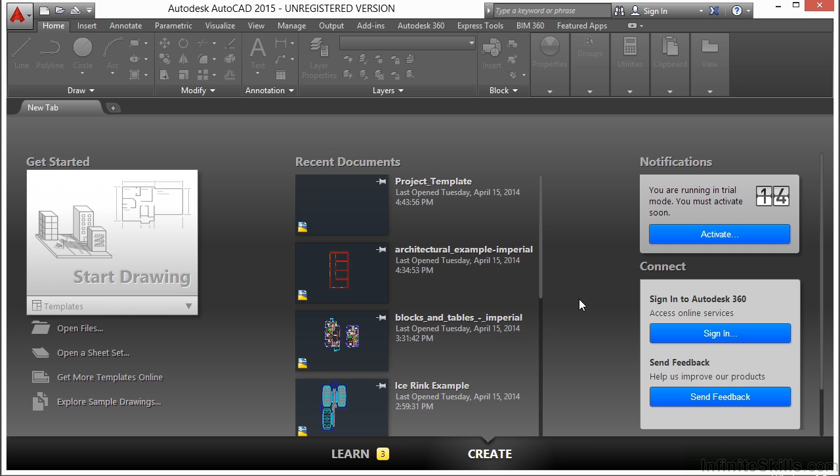Let's open up the dimension example drawing for this chapter. You can create dimensions for a variety of object types in many orientations. Linear dimensions can be horizontal, vertical, aligned, rotated, a baseline, or a continued or chained string of dimensions. Here we have several dimensions on this bracket.

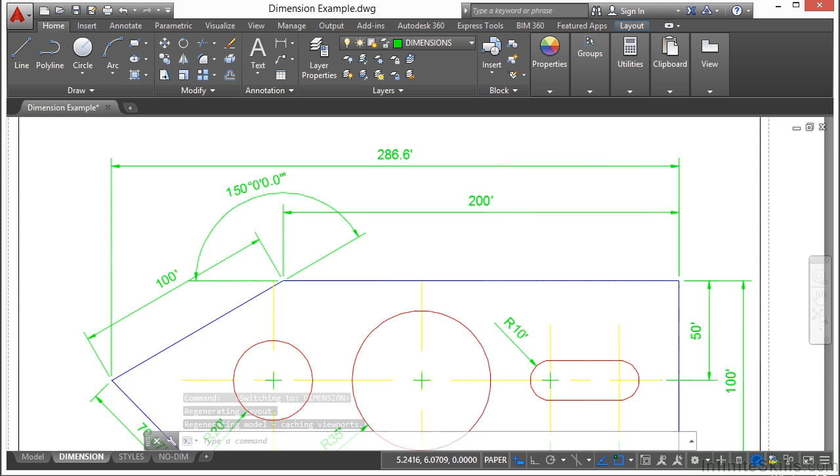Dimensions can also be associative, non-associative, or exploded. Associative dimensions adjust to changes in the geometric objects that we measure. I recommend that you always use associated dimensions, especially if you're placing your dimensions in paper space, as is the example here. Dimension associativity defines the relationship between your objects and their dimensions.

Now, there are three types of associativity between geometric objects and dimensions. Associative dimensions. These types of dimensions automatically adjust their locations and orientations and measurement values when the geometric object associated with them is modified. Now, dimensions in a layout may be associated to objects in model space. That's where the DIMASSOC system variable is set to 2. We'll go over this later on.

Non-associative dimensions. Non-associative dimensions do not change when the geometry changes that they're measuring. The dimension variable set for this is DIMASSOC set to 1. That's DIMASSOC when it's set to 1.

Now, exploded dimensions. These types of dimensions contain a collection of separate objects rather than a single dimension object. The DIMASSOC system variable is set to 0. The appearance is very easy to alter, but they are no longer controlled by a dimension style or by geometric object. They will not update automatically like associative dimensions will.

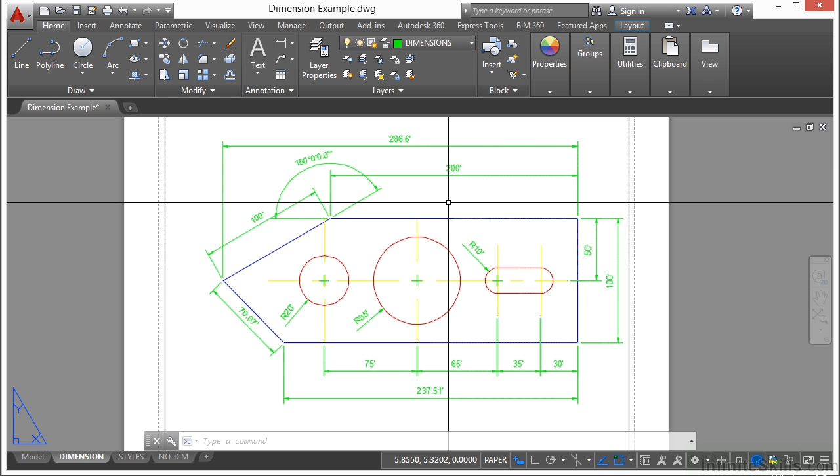Dimensions have several distinct elements. They have the text, they have dimension lines, that's the horizontal line here. They have arrowheads, which you can change to be many different shapes. They also have extension lines. Those are the vertical lines that you see here that come from the object they're dimensioning and extend up to the dimension line and arrowhead. All of these can be controlled, defined, and altered through a dim style or dimension style. And this can be done also through a properties manager.

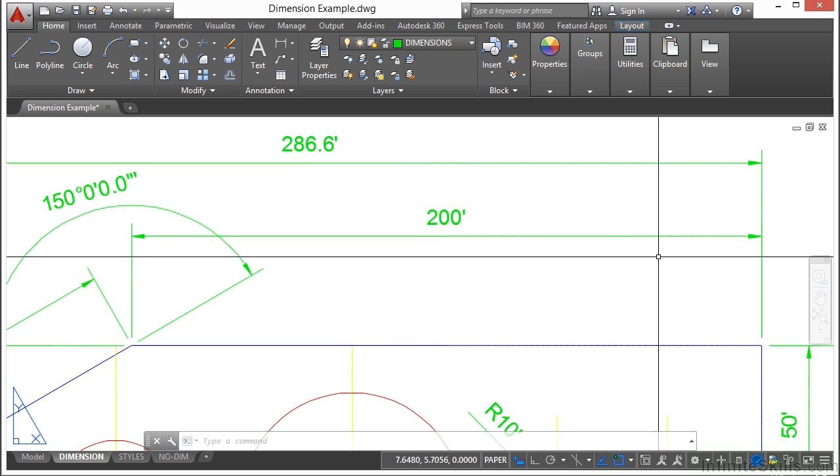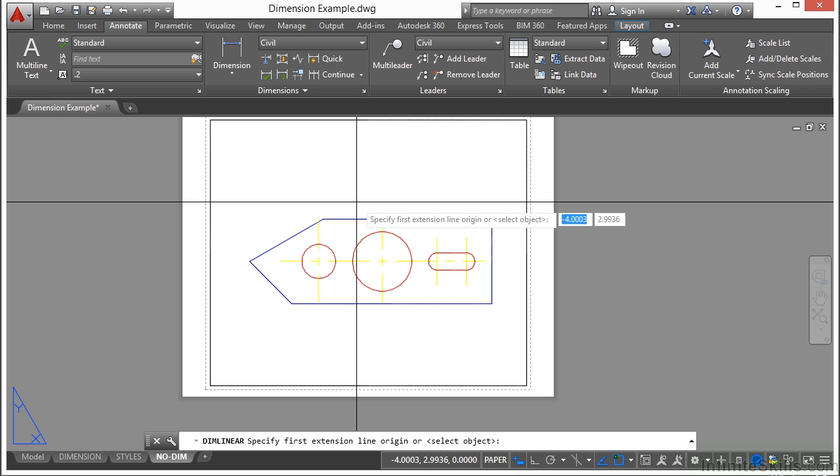Let's make some basic dimensions. Let's go to the No Dim Paper Space tab. Go to the Annotate tab on the ribbon. Go to the Dimensions panel. Click on the arrow here from Dimension and click on Linear. Make sure your Osnaps are turned on and that you have your endpoint Osnap running. When you're set up that way, you'll be able to create some dimensions very quickly.

I'll show you. I snap to here, and I have my dimension. If I select my aligned dimension, I can get dimensions at angles that give the true length value. If I go back to my linear dimension, this will create a dimension that is locked into horizontal or a vertical orientation. Those are your basic dimensions, the linear and the aligned.

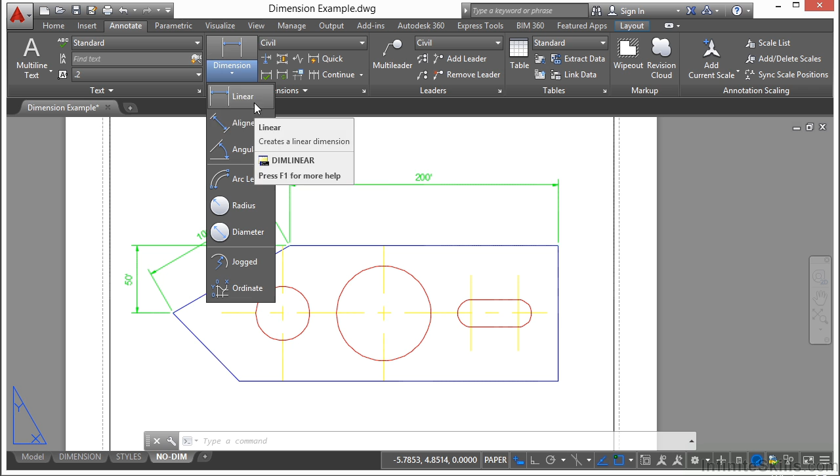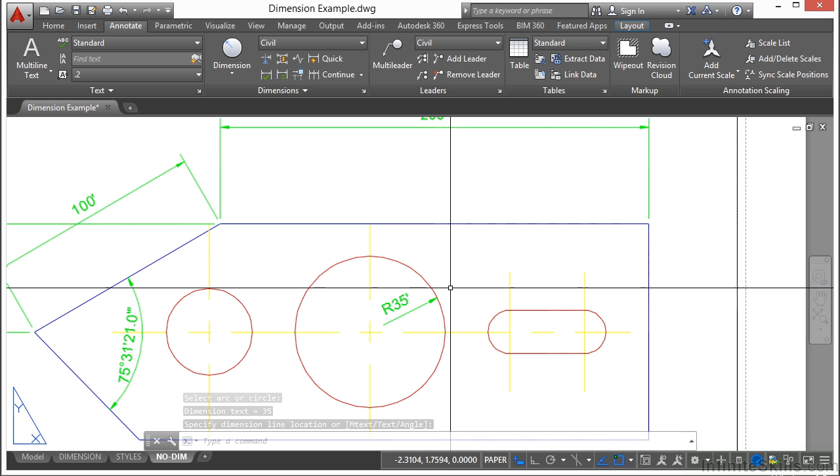Now, an angular dimension will display the angle between two lines or objects. Radial dimensions will give you the radius or diameter of a circle or arc. Just select the object of the circular nature and then pick where you want it to go. That is the very basic use and application of dimensions. We're going to get into each part of it a little bit more in detail.